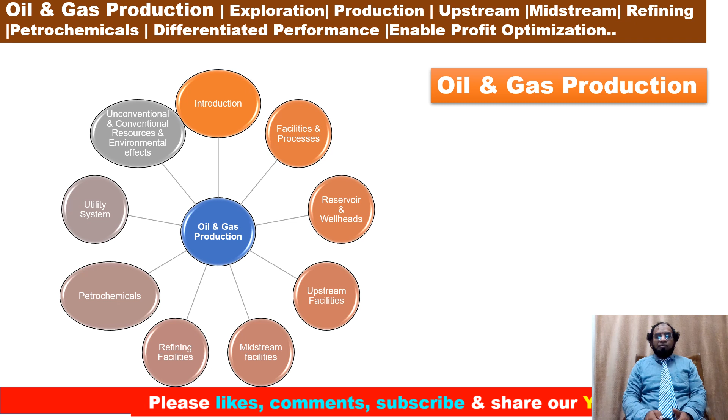Okay, this is my plan. Introductions, oil and gas production. First introduction, facilities processing, reservoir and wellhead, upstream facilities, midstream, refining facilities, petrochemicals, utility system, unconventional and conventional resources, and environmental effects. What is the ultimate goal? Shaping the clean and sustainable global energy delivery. Plan to deliver more than 300 lectures in the next couple of years.

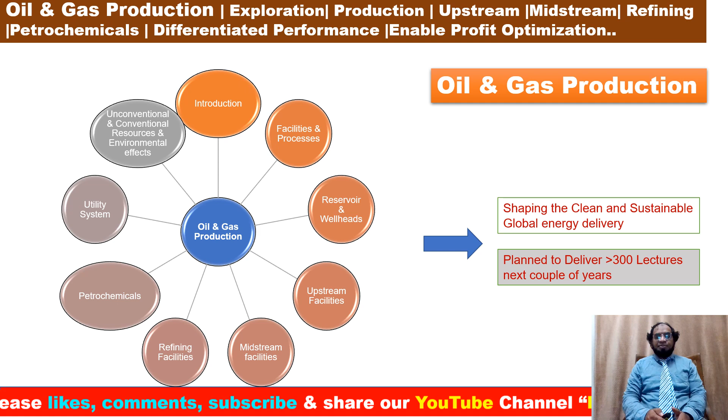Okay, today I'm going to discuss oil and gas production, upstream oil and gas processing facilities. Today my target is to address fiscal metering, storage and marine loading. Key takeaway points: lecture number 16, facilities process onshore and offshore, fiscal metering, storage and marine loading.

Okay, oil and gas storage, metering and export. The final stage before the oil and gas leaves the platform consists of storage, pumps and pipeline terminal equipment. Okay, first we are going to discuss fiscal metering. With fiscal metering, partners, authorities and customers all calculate invoices, taxes and payments based on the actual product shipped out.

Often custody transfer also takes place at this point, which means transfer of responsibility or title from the producer to the customer, shuttle tanker operator or pipeline operators. Although some small installations are still operated with a dipstick and manual records, larger installations have analysis and metering equipment. So in a terminal, on-site, we are still using dipsticks. To make sure our readings are accurate, a fixed or movable prover loop for calibration is also installed.

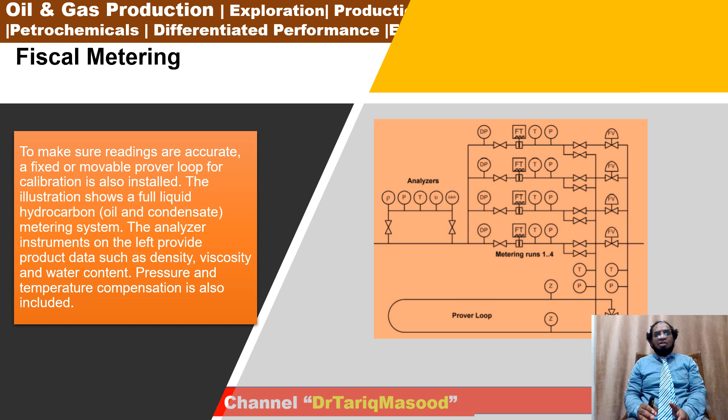The illustration shows a full liquid hydrocarbon (oil and condensate) metering system. The analyzer instruments on the left hand side provide data such as density, viscosity, water content, pressure and temperature. Compensation is also included during the calculation.

Okay, furthermore, for liquids, turbine meters with dual pulse outputs are most common. Alternatives are positive displacement meters, passing a fixed volume per rotation or stroke, and Coriolis mass flow meters. Those instruments cannot cover the full range with sufficient accuracy. Therefore, the metering is split into several runs, and the number of runs depends on the flow. Each run implies one meter and several instruments to provide the temperature and pressure correction.

Open and closed valves allow runs to be selected, and control valves can balance the flow between runs. The instruments and actuators are monitored and controlled by the flow computers. If the interface is not digital, dual pulse trains are used to allow direction sensing and fault finding. To obtain the required accuracy, the meters are calibrated. The most common method is a prover loop.

A prover ball moves through the loop, and a calibrated volume is provided between the two detectors. When a meter is to be calibrated, the four-way valves open to allow oil to flow behind the ball. The number of pulses from when it passes one detector to the other end is counted. After one loop, the four-way valves turn to reverse the flow direction and the ball moves back, providing the same volume in reverse, again counting the pulses.

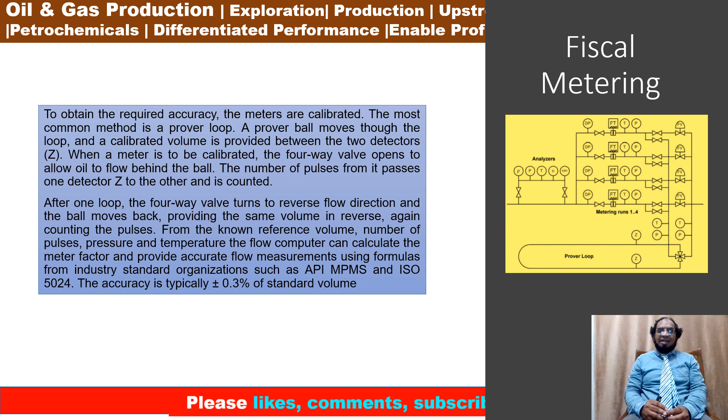From the reference volume, number of pulses, pressures and temperature, the flow computer can calculate the meter factors and provide accurate flow measurements using the formulas from industry standard organizations such as API MPMS and ISO 5024. The accuracy is typically plus or minus 0.3% of standard volume. Okay, similarly, gas metering is similar, but instead the analyzer will measure hydrocarbon content and energy value.

It will measure MJ per cubic meter or BTU, kilocalorie per cubic foot, as well as pressure and temperature. The meters are normally orifice meters or ultrasonic meters. Orifice plates with a diameter less than the pipe are mounted in the cassettes. The pressure differential over the orifice plates as well as the pressure and temperature is used in standard formulas such as AGA3 and ISO 5024/5167 to calculate a normalized flow.

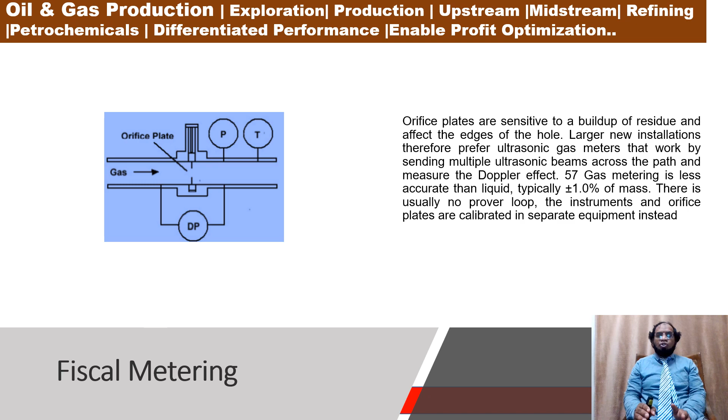Different ranges are accommodated with different sizes of restrictions. Orifice plates are sensitive to a buildup of residue that affects the edges of the hole. Larger new installations therefore prefer ultrasonic gas meters that work by sending multiple ultrasonic beams across the path and measure the Doppler effect.

As you can see here, at various points in the movement of oil and gas, similar measurements are taken, usually in a more simplified way. Examples of different gas types are flare gas, fuel gas, and injected gas, where required accuracy is 2 to 5%. So for my next slide, we are going to discuss storage tanks.

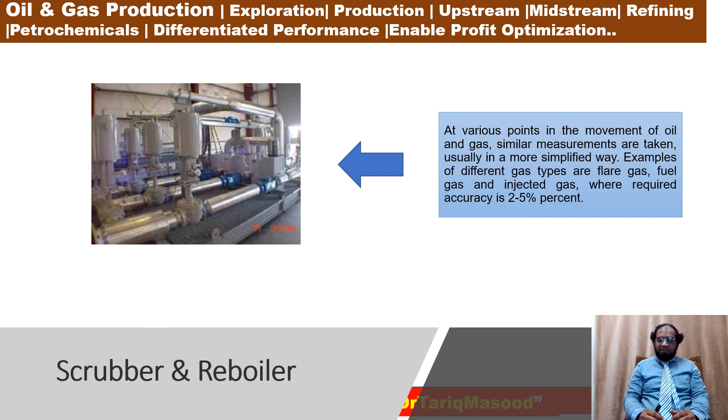Storage tanks. On most production sites, oil and gas are piped directly to the refinery or tank terminals. Gas is difficult to store locally, but occasionally underground mines, caverns, or salt deposits can be used to store gas. On a platform without a pipeline, oil is stored in onboard storage tanks to be transported by shuttle tanker. The oil is stored in storage cells around the shafts on concrete platforms and in tanks on floating units. On some floaters, separate storage tankers are used.

Ballast handling is very important in both cases to balance the buoyancy when the oil volume varies. For onshore, fixed roof tanks are used for crude, floating roof for condensate, and rock caves are also used for storage purposes.

Furthermore, special tank gauging systems such as level radars, pressure, or floats are used to measure the level in storage tanks, cells, and caves. The level measurement is converted to volume via tank strapping tables depending on the tank geometry and compensated for temperature to provide a standard volume. Float gauges can also calculate density, and so mass can be established.

A tank farm consists of 10 to 100 tanks of varying volume for a typical total capacity in the area of 1 to 50 million barrels. Storage or shuttle tankers normally store up to 2 weeks of product: 1 week for normal cycles and 1 extra week for delays, for example bad weather. This can amount to several million barrels.

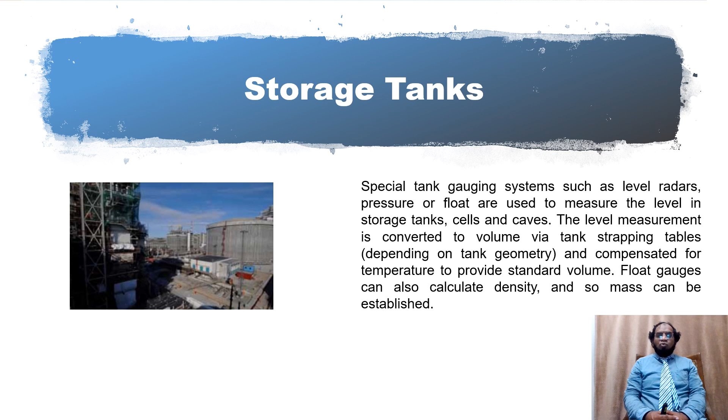Accurate records of volumes and histories are kept to document what is received and dispatched. For installations that serve multiple production sites, different qualities and product blending must also be handled. Another planning task is forecasting future receipts and deliveries of products, for stock control and warehousing requirements. A tank farm management system keeps track of all stock movements and logs all transport operations that take place. In the next slide, we're going to discuss marine transport.

Marine loading and transport. Marine loading systems consist of one or more loading arms, jetties, pumps, valves, and metering systems. Tanker loading systems are complex both because of the volumes involved and because several loading arms will normally interact with the tanker's ballast system to control the loading operations.

The tanks must be filled in a certain sequence, otherwise the tanker structure might be damaged due to uneven stress. It is the responsibility of the tanker ballast system to signal data to the loading system and to operate the different valves and monitor the tanks on board the ship.

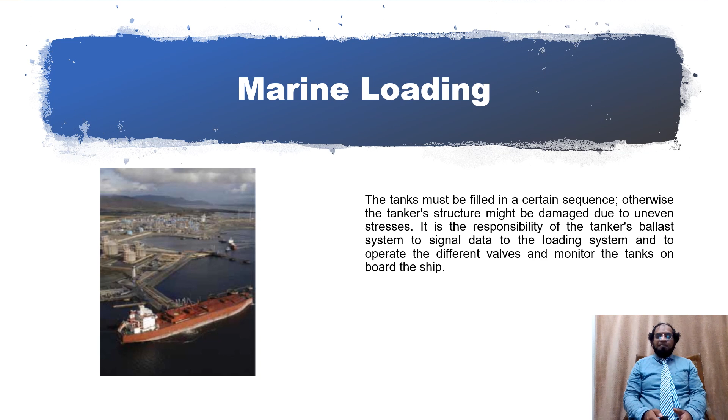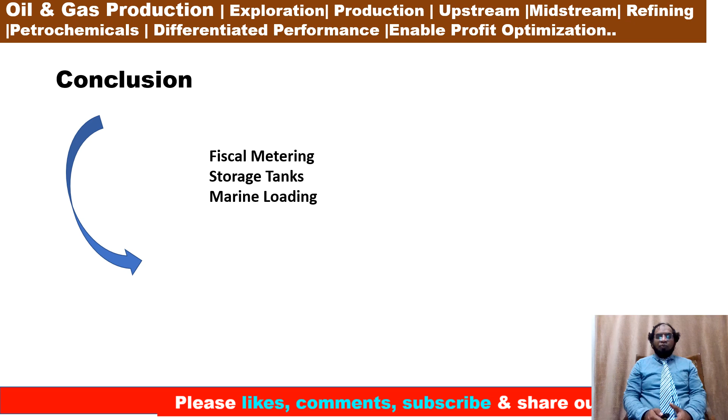Thank you very much for your patience. This was my last slide. Now we will conclude today's lecture. What we discussed today: first we had fiscal metering, then storage tanks and marine loading. So my next topic will be midstream facilities.

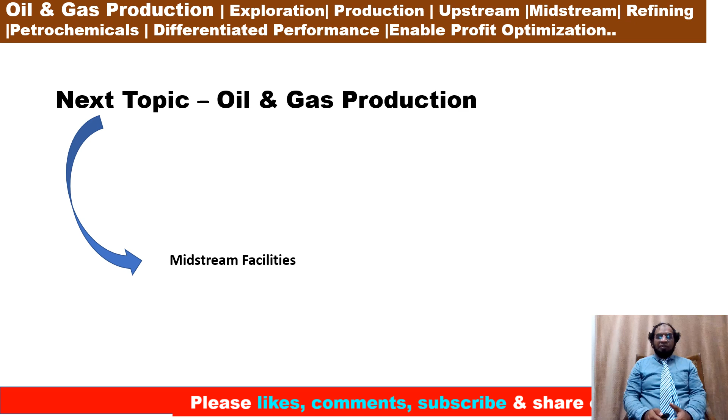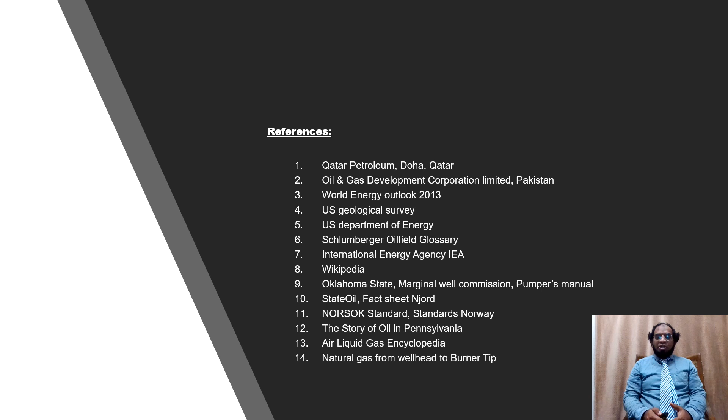A few references: Qatar Petroleum, Oil and Gas, World Energy Outlook, US Geological Survey, US Department of Energy, Schlumberger Oilfield Glossary, International Energy Agency, Wikipedia, Oklahoma State Oil Fact Sheets, The Story of Oil in Pennsylvania, Air Liquide Gas Encyclopedia, Natural Gas from the Wellhead to Burner Tip.